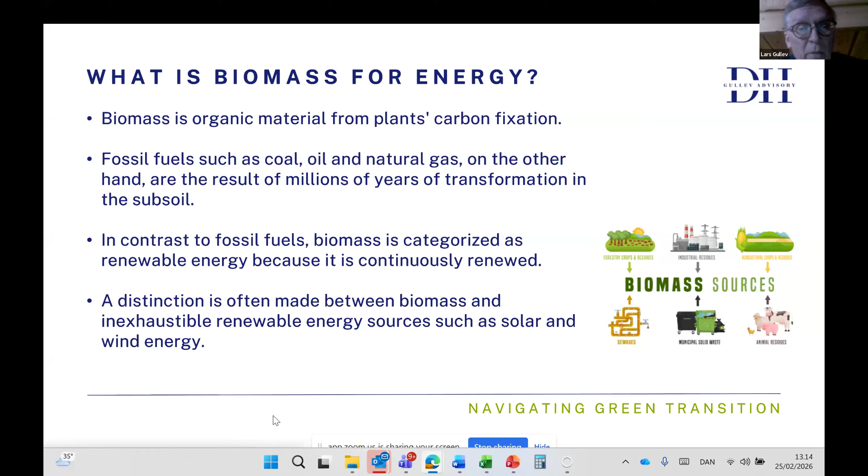When we talk about fossil fuels, of course they also consist of carbon, but it's carbon which has been built up in materials like oil, gas and coal many years ago. When we talk about solid biomass, it's in the form of firewood, wood chips, wood pellets, and energy willow, which I will come back to later in this presentation.

Then we have straw from agriculture in Denmark. We also have biodegradable waste, the organic material in waste from households. We talk about liquid biomass in the form of biodiesel, bioethanol, and bio-oils, which can be made from different kinds of crops, such as straw and rapeseed. And then we have the last fraction of biomass, which is biogas, produced based on manure from cows and pigs in the agriculture sector and other organic residual materials. Next please.

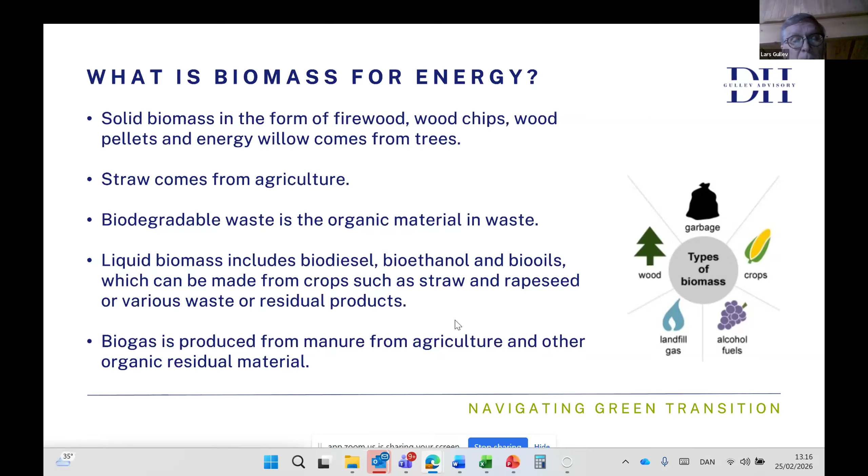To give you an impression of the consumption of biomass in Denmark, I will give you a few slides. So next please. The consumption of biomass for energy in Denmark is shown on this figure, and you can see during the last 20 or 35 years we have increased the consumption by a factor of 5, from 40 to 200 petajoule per year. We have it divided here into waste from organic fractions, straw, firewood, wood chips, wood pellets, biogas, and then biodiesel, oil and ethanol. So you can see a lot of fractions, where the consumption of wood chips and wood pellets is the fraction where the development has been most increasing during the last 10 to 15 years.

So next slide, please.

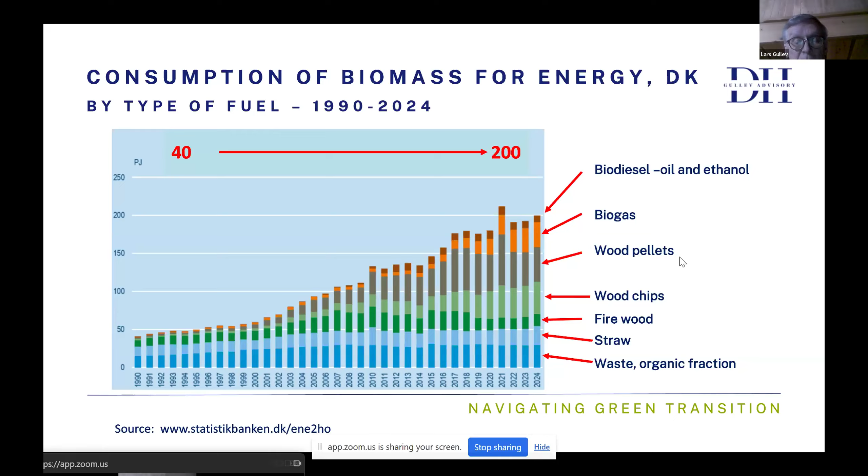If you look at the district heating sector and the production here, and again look at the different kinds of fuels we use there, you can see that 79% of all energy used in the district heating sector for producing district heating is more or less renewable energy. It's different kinds of biomass, but it's also electricity, primarily from wind turbines and PV. And then the last 21% is based on coal, oil, natural gas, and the non-bio part of waste from households.

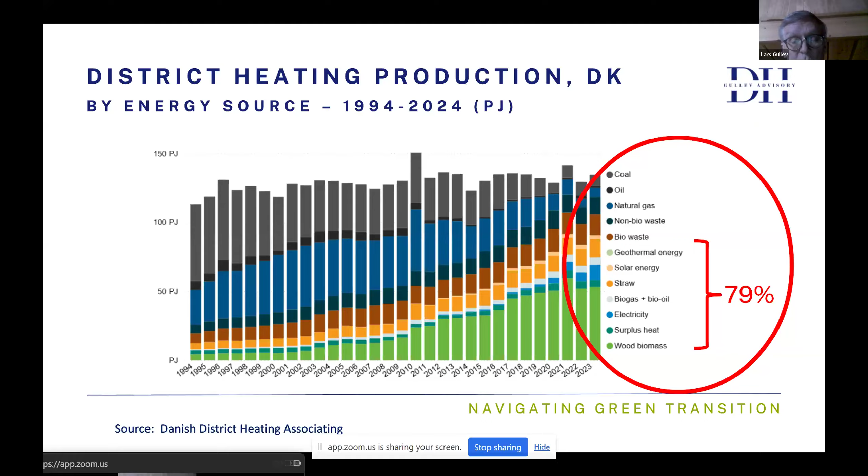So if we take the next slide, please. It shows again the development from 1998 until 2023. You see in the middle the development of renewable energy in the district heating sector. The consumption of coal has been dramatically reduced from 1998 until 2023, and at the same time, the consumption of biomass has increased. The biomass is the green one, and coal is the black one. So you can see a dramatic shift from coal to biomass in the Danish district heating sector.

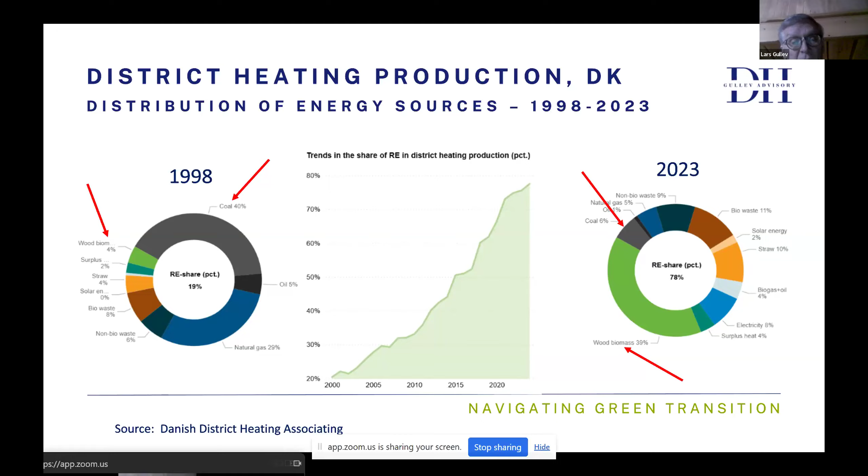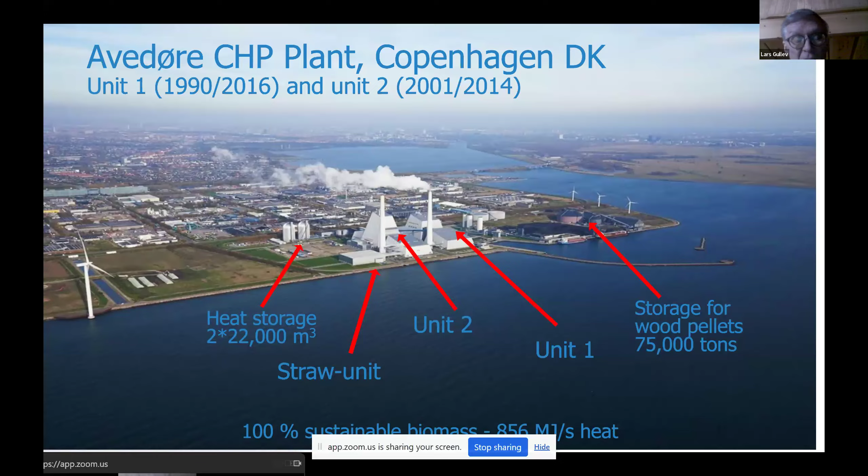Next slide, please. A huge installation just for inspiration. That's a combined heat and power plant built back in 1990 and 2001, from the time when we focused on centralized district heating production. We have changed this philosophy today, like you also do in Ukraine, to have a more decentralized heat production. But this is a huge combined heat and power plant in Copenhagen that consists of 2 units, 2 storage tanks of 2 times 22,000 cubic meters, and a storage for wood pellets. I will go more into detail with these 2 units in the next slides.

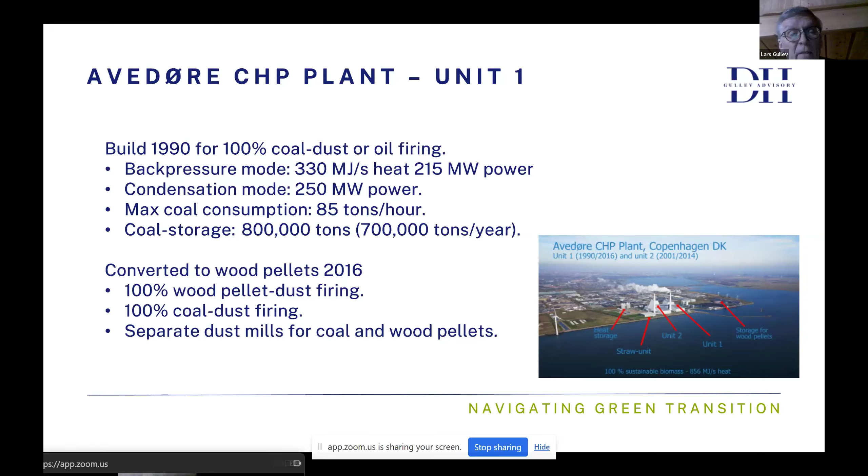Next slide, please. Unit 2 was built in 2001 for 100% natural gas and oil firing, and also straw in a small separate unit, or 75% wood pellet firing. It had a steam boiler and gas turbines, and in total back pressure mode it was 565 megajoules per second heat and 505 megawatt power. In 100% condensing mode, 585 megawatt power. It was converted to 100% wood pellet firing in 2016, so it could be fired 100% by wood pellets or 100% by natural gas.

The wood pellet consumption for Unit 1 and Unit 2 is 7,000 tons per day. From the picture in this slide, you can see that the storage facility for wood pellets is 75,000 tons. That means we have 10, 11, 12 days of storage capacity for the fuel now, compared to the good old days when the unit used coal and we had storage facilities for 1 year's operation. That means this is a challenge for the logistics when you make this shift from coal to wood pellets. Next slide, please.

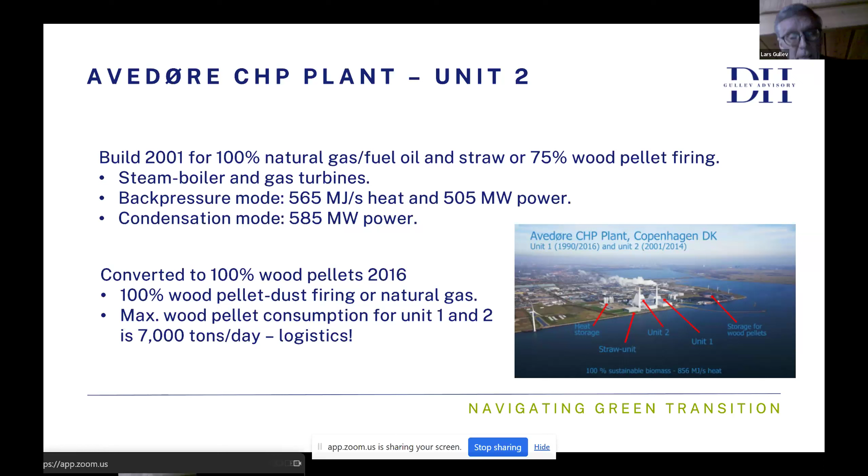Smaller installations in Denmark. Here's one from a smaller district heating plant. Today, 97% of their heat production comes from straw from the farmers in the neighborhood. The existing 7.5 megawatt boiler from 2006 was supplemented with a new boiler of the same size in 2014. So a district heating company almost 100% based on straw firing. And the next one.

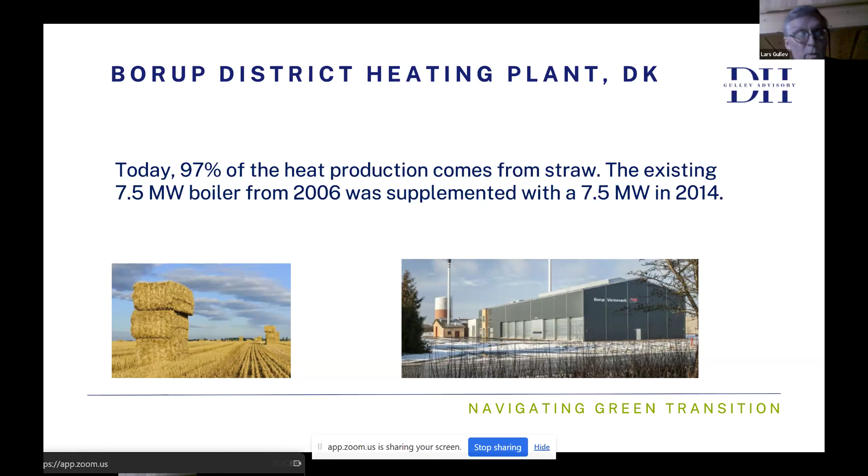Next slide, please. Yes, that's another district heating plant, founded many years ago, back in 1961. But what's interesting here is that today they have different units: an oil-fired plant of 16.5 megawatt, a wood chip-fired plant of 7.5 megawatt, a straw-fired plant from 2018 of almost 9 megawatt, and an electrical boiler. So instead of having a production capacity linked to one fuel, they can use oil, wood chips, straw, and even electricity. The electricity here is not primarily for producing district heating, but primarily for delivering services to the power system.

We can come back to that in another webinar. Yes, please, next one.

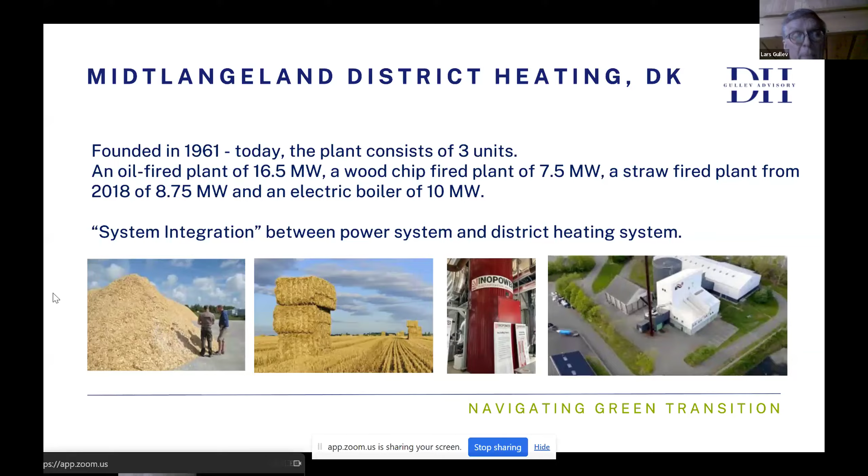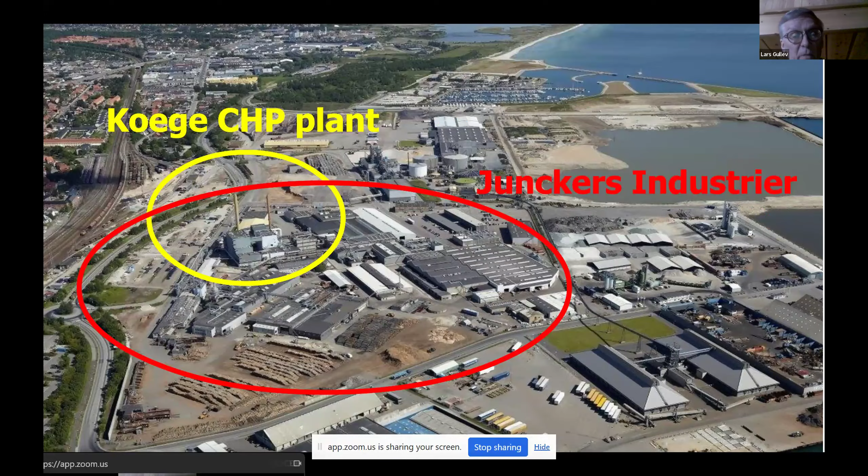Yeah, a combined heat and power plant, an industrial combined heat and power plant with 2 units, 7 and 8, built back in 1986 and 1998. Next one, please. It's built in connection with a big industry, the Junckers industry, and they built this combined heat and power plant to utilize surplus materials from the factory. Next one, please.

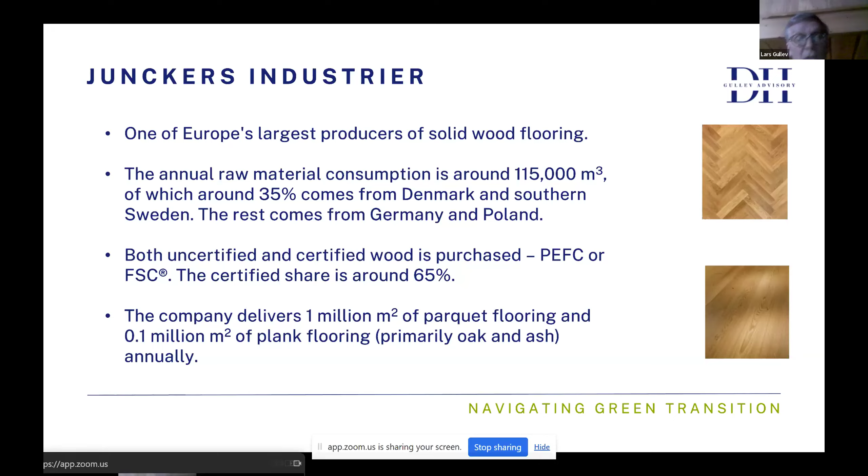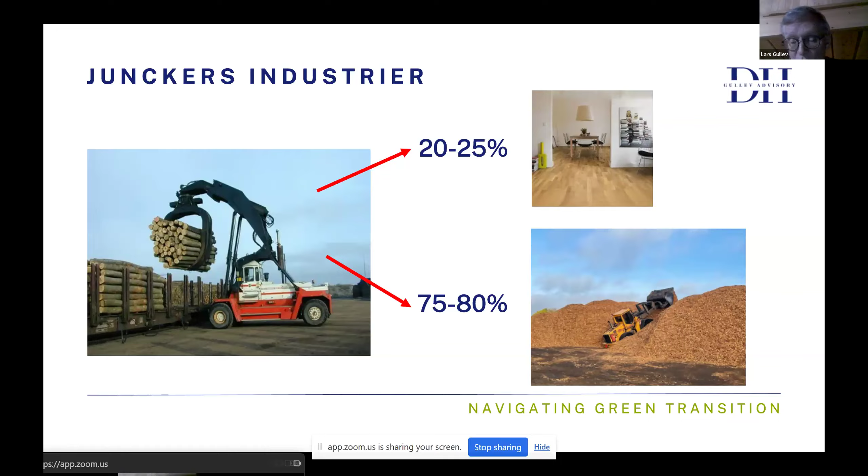When they produce these floorings, they get in the raw materials as logs. And when you look at such a log, they utilize between 20 and 25% for the floor production. The rest, between 75 and 80%, that's waste. So they have to get rid of this waste in the form of wood chips, in the form of sawdust, and in the form of dust. So next slide, please.

This biomass coming from the Junckers industry, it's 60,000 tons per year in the form of, as mentioned, wood chips, sawdust, and dust. And there's a contract between the factory and the owner of the combined heat and power plant going for 15 years, meaning that the district heating company owning the combined heat and power plant has an obligation to buy this raw material, and the factory has an obligation to sell all their waste biomass material to the district heating company. Next one, please.

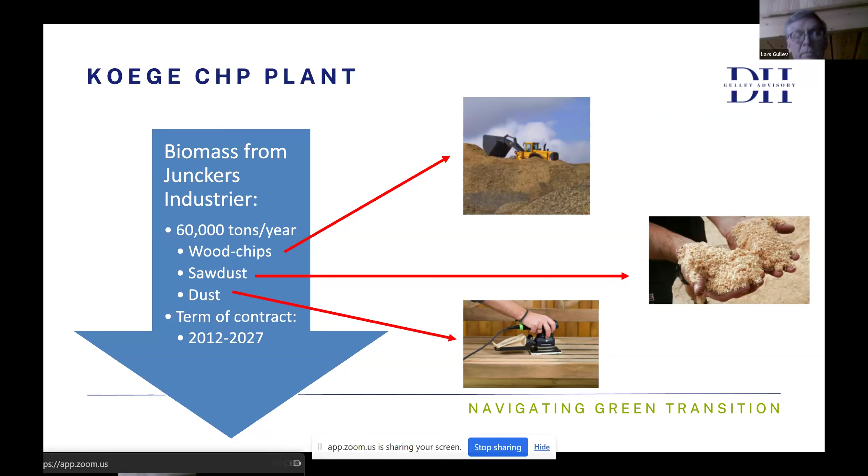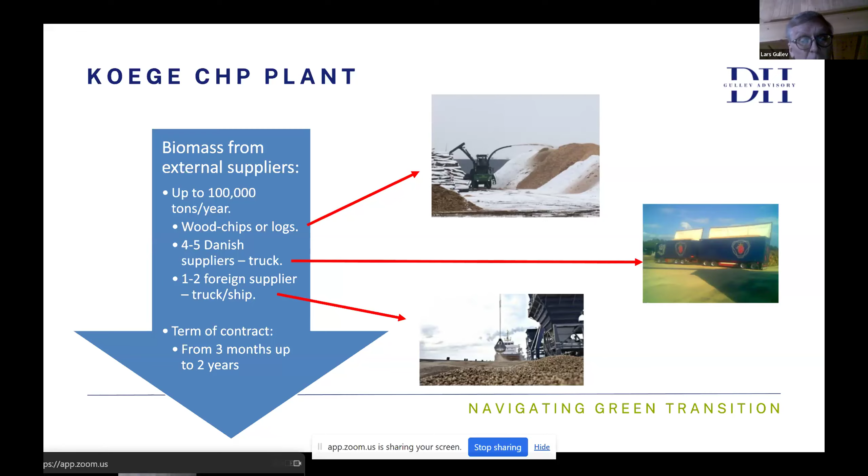Furthermore, the combined heat and power plant buys up to 100,000 tons of raw material from external suppliers in the form of wood chips or logs. There are 4 to 5 Danish suppliers of wood chips to the plant. It's transported to the plant by truck, and then there are 1 to 2 foreign suppliers, and it's transported by truck or shipped to the combined heat and power plant. And here we operate with contracts with a length between 3 months and up to 2 years. Next one, please.

The construction of Unit 8, it's relatively simple. It was built back in 1998, has an input capacity of 65 megawatts, and it's supplying electricity to the grid and process steam to the factory and to the production of district heating. And again, the steam production is based on wood chips, sawdust, and dust, all taken from the Junckers Industrier.

When the district heating company VEKS took over the plant back in 2012, they reconstructed and converted the plant from a condensing mode to a back pressure mode plant, meaning that all surplus heat from this plant is utilized for district heating purposes. The next one, please.

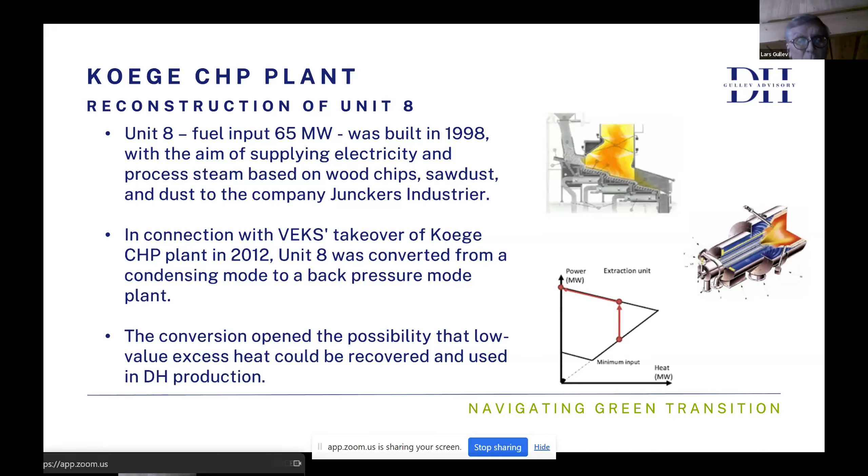They have improved the plant after taking over. So today the surplus heat from the cooling circuit for the lubricating oil is utilized in the district heating system. So 650 kilowatts is utilized, and the payback time for this investment was around 6 years. Then the ignition of the dust burners has been changed. So instead of using 300 liters of fuel oil for every start, they now use 3 kilos of wood pellets.

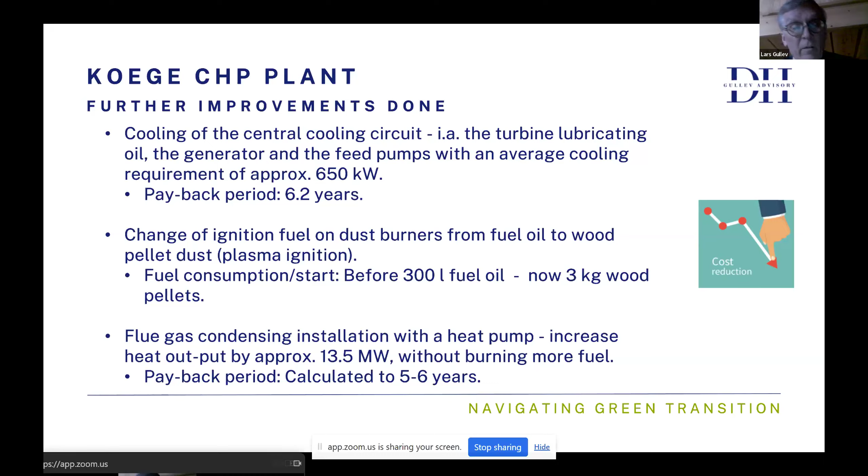And at last, a flue gas condensation installation with a heat pump has been installed, giving the possibility to utilize around 13 megawatts more without burning more fuel, and the payback time for this is calculated to between 5 and 6 years. So a lot of possibilities to make the process even more efficient. So next slide, please.

So what about bioenergy in Ukraine? A few slides. So if you jump to the next one, you have had a stable development of the production of biomass, around 3 million tons per year now. It's calculated by the Bioenergy Association of Ukraine that your potential is around 23 million tons. That means between 6 and 7 times more than you use today. So next one, please.

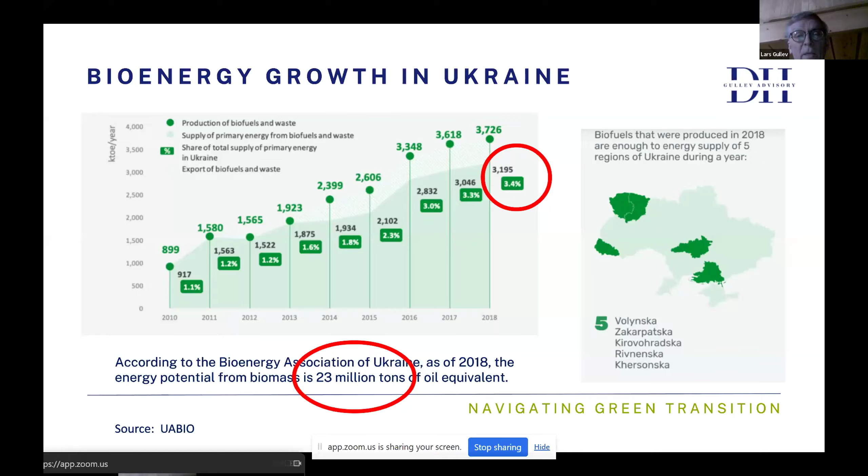The topic, energy crops. Energy crops are plants that are grown specially for use as a fuel or for biofuel production. At the moment, you have 3 million hectares of unoccupied agricultural land, of which you only use 0.1%. So if you used a part of this area for energy crops, if you used 1 million hectares, that means 1/3, you could replace half of all Ukrainian imported gas, the figures from 2018. So that's a potential if you utilize 1/3 of this area, which is not utilized today.

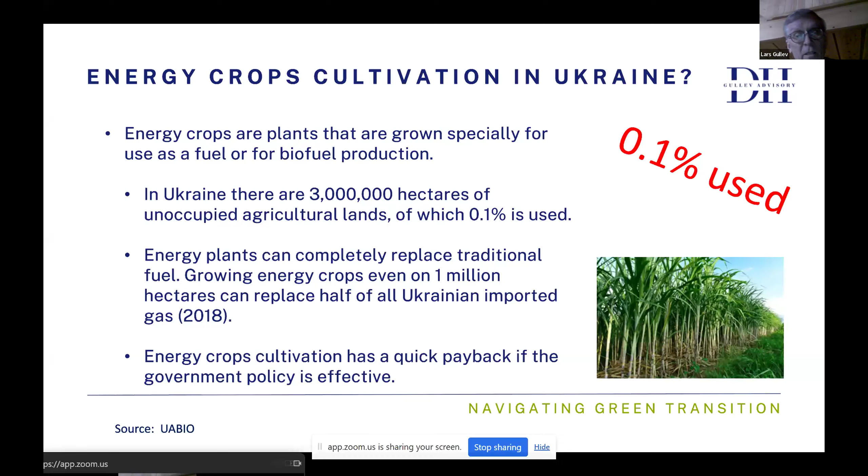And the benefit of using these energy crops is that it has a quick payback time if the policy is supporting this development and is effective. So next one, please. These figures, they are all from your Ukrainian bio organization, and it shows the development where you are today, where you are expected to be in the 2030s, and in 2050. You can see that the amount of energy crops is expected to increase from almost nothing to 3 million tons per year when we reach 2050.

So if you should follow this estimation of consumption of biofuels in Ukraine, you are busy. You are busy already this afternoon. There's no time for waiting. It's a hard job, but you have the potential. So I think that was the second last slide, and the last one should be a thank you.

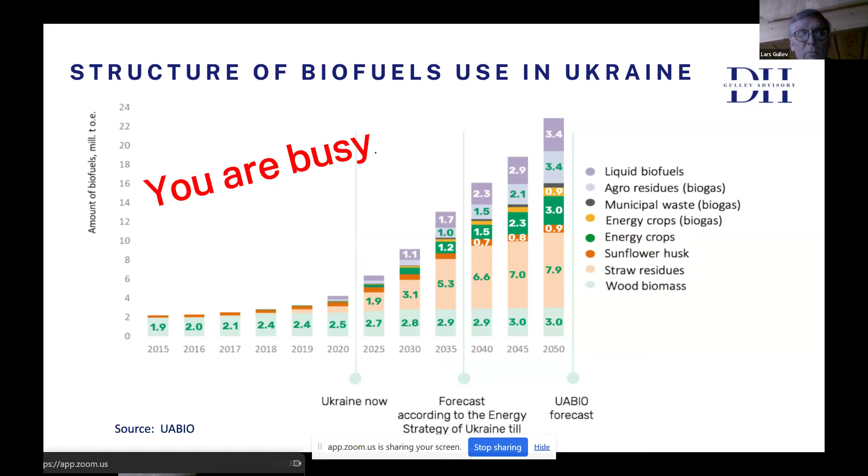Yeah, good. So that was a quick introduction to how we do it in Denmark. When we talk about biomass, we use many different types and fractions of biomass, and we use it in both huge installations, but also in small installations. When it's in small installations, it's often in a close cooperation between the district heating company and farmers or owners of forest. So it's possible to make long-term contracts.

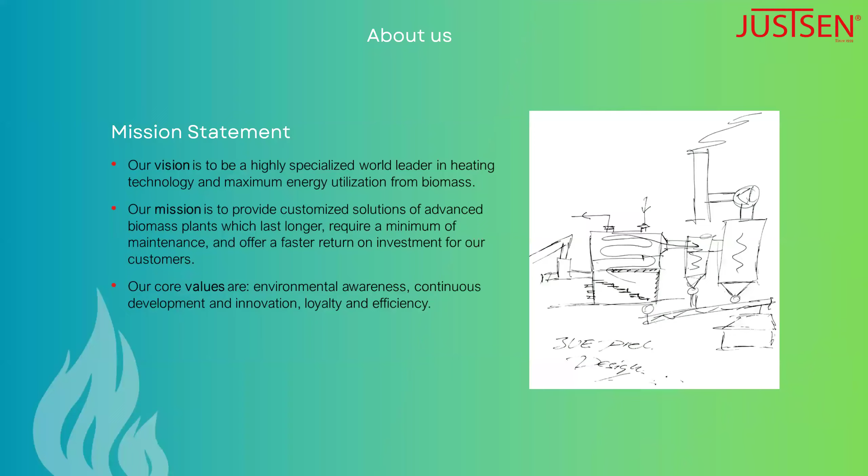So about us is that we want to be a world-leading biomass boiler manufacturer, and we want to be it in a style of OEM, where we are working with partners around the world. So we always comply with relevant environmental legislation, not just in the short term, but also looking to the future. And if we think about Ukraine, everything that we are doing is complying with EU legislation, because we expect Ukraine to become an EU country. So the systems will be designed according to those needs.

We do a lot of these speeches around the world, mostly in webinars. We are a member of World Bioenergy Association. We work in Australia, New Zealand, Asia, Central and South America, and all over Europe. So we think it's a very good idea to be member of these associations. And DBDH, Danish Board of District Heating, is not on this because I apparently haven't updated it yet.

And then we only deal with biomass boilers. And then we have a little side business working with waste incineration also, but it is in a more limited scope. Our solutions, they cover hot water, saturated steam, superheated steam, which is relevant here, high pressure hot water, and a little bit of thermal oil systems also, but that is very rare.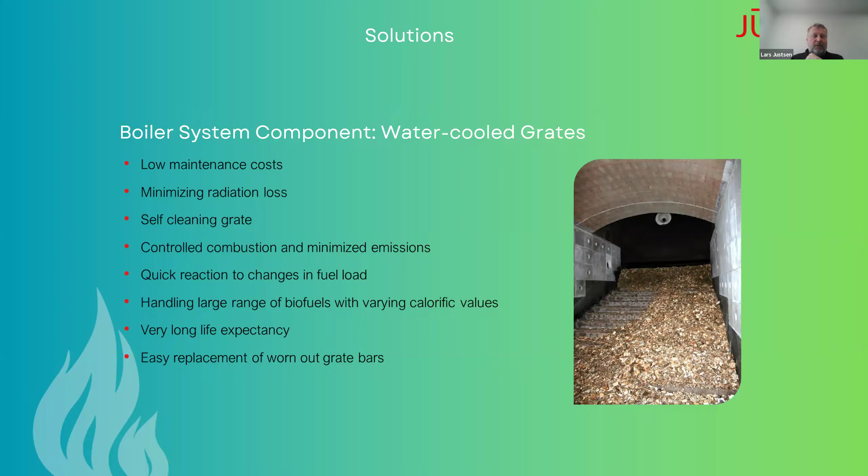So if we have very moist fuel, we equip the inside of the grate with ceramic tiles, which means that the ramping times on a system, which is especially important for agricultural residues and CHP, is shorter compared to a refractory lined air-cooled grate system.

And during our lifetime, we have developed different systems. When my parents started this company in 1958, there was nothing called biomass in reality. It was waste wood that was used in woodworking industry, and sometimes it was burned, and you made a little bit of heat on that. We started exporting in 1970, and as Lars Gullev's slide showed, we have now 80% coverage by renewable energy in Denmark. So we are, of course, mainly looking at the export markets.

And now to our findings from our work in the Mykolaiv region. We have studied 14 different types of agricultural residues and energy crops, and looked at their characteristics and their behavior in boiler systems. So we have studied these 14, but I have taken 5 out here because they have characteristics that are different from each other. First of all, Paulownia and willow, we have found out that they behave a lot like wood chips in a boiler system. And I have highlighted with red the things I want to talk about here.

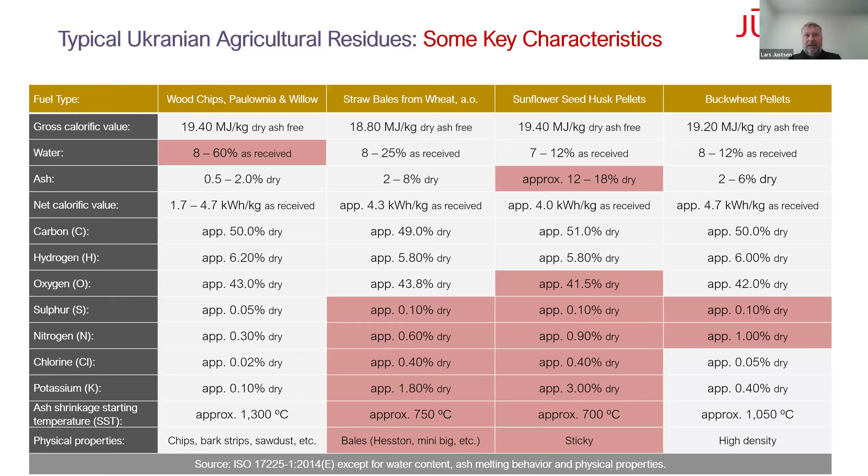Then on to buckwheat pellets, which was a nice surprise for us during these tests. And that is that they are slightly higher in sulfur and nitrogen than wood chips, Paulownia and willow, which makes it very, very suitable for highly efficient CHP plants. So that was the characteristics. My next slide then highlights what are the challenges here.

We have already talked about the large range of water content to cover with a combustion system for the wood chips and similar fuels. For the straw bales from wheat, the sulfur will develop SO2 emission plus corrosion. There are two types of corrosion relevant for a CHP plant. The first type is what we call low temperature corrosion. That is when you have a moist atmosphere, which you have in the ignition zone of a biomass fuel boiler, then you can have wet flue gases that contain SO2 that has already combusted that will form droplets on the heating surfaces. So that's low temperature corrosion.

When you do CHP, you have something called a superheater inside the boiler. And if you are above 360 degrees on that steel, SO2 becomes extremely corrosive. It's an exponential development of corrosion there. And I will state later how that influences the electrical efficiency. We have the NOx emissions that are part of EU legislation. We have the chlorine that develops hydrogen chloride, extremely corrosive. Dioxins, that is an emission that is not measured on biomass plants, except in France, but it is often relevant for local planning permissions.

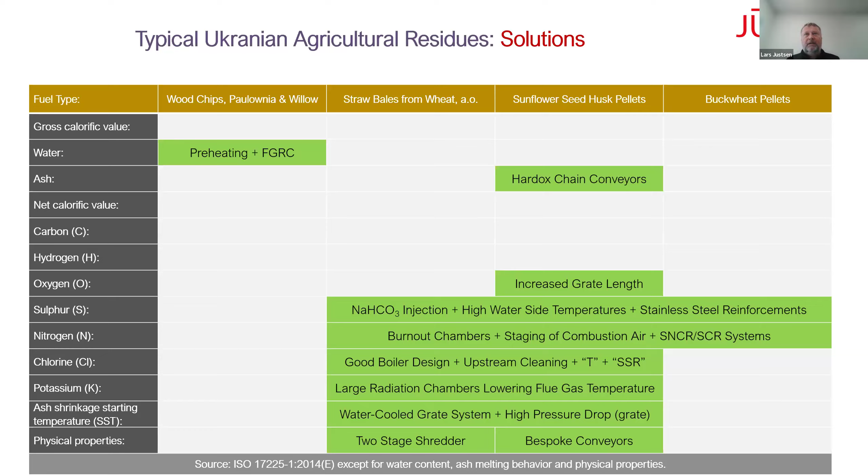I will try and speed up now. I will now go to the steam Rankine cycle to make CHP.

You have the boiler system producing superheated steam that goes to a turbine of the back pressure type with extraction, where you are entering at very high temperature and very high pressure, and then at the outlet of that you take a part of that and put it to the deaerator.

The rest goes into the turbine condensing stage, and as you saw on Lars Gullev's presentation, there are two completely different electrical outputs based on whether you're condensing the steam in the turbine or not. If you're condensing, which is what you would typically do in district heating, then you have wet steam on the backside of that condensing turbine. It will typically be 94% dryness, and that is what gives you an extra 6% of electrical efficiency.

And it goes to a steam condenser, and that steam condenser is cooled by the heating surface of the district heating. And that's the whole philosophy about making combined heat and power in a steam Rankine cycle.

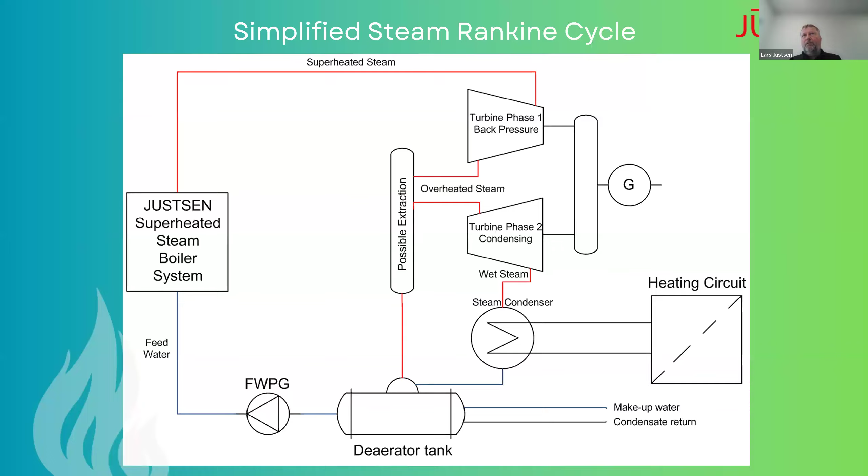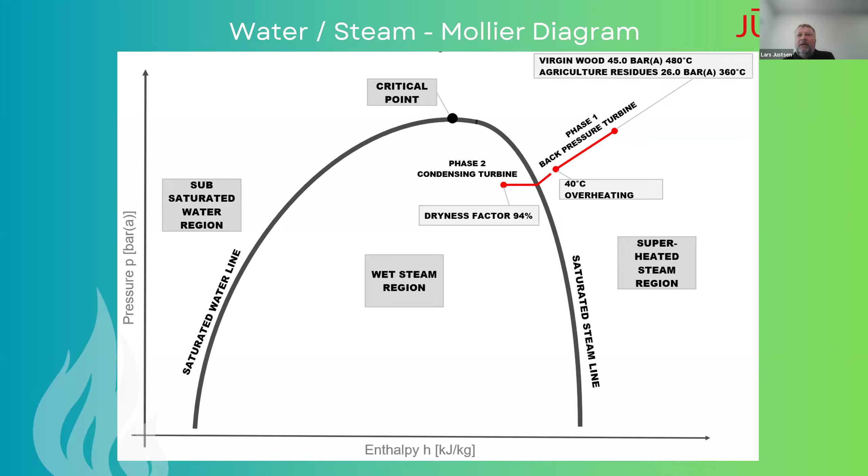Typically you will have around 40 degrees of overheating left when it exits the back pressure turbine. Then when it goes into the condensing stage, it passes through the saturated steam line and into the condensing phase, and that's what generates the electricity. It's a quite simple calculation, which I'll show you in a moment.

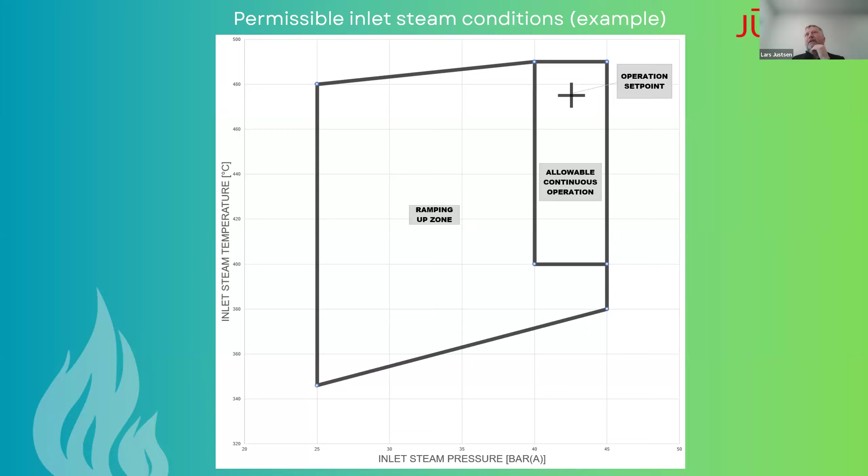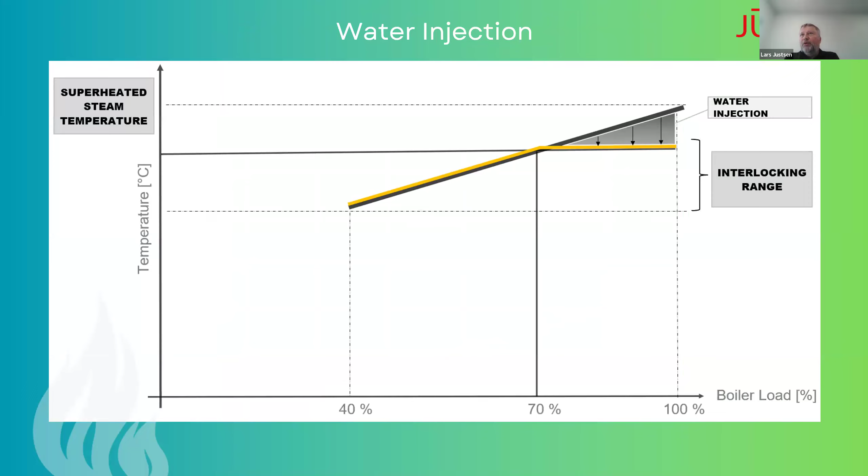And in the superheater, there is something called water injection, so you can flatten the curve and always operate between 70 and 100% load at that point.

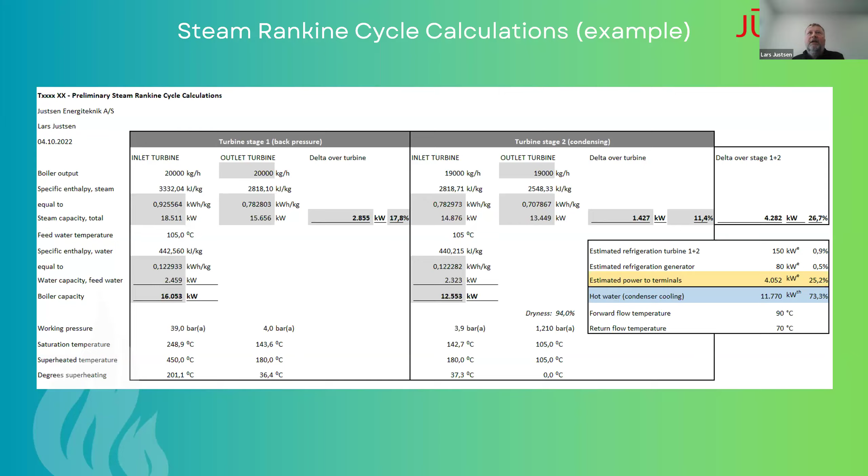That should not be confused with electrical efficiency. For electrical efficiency, you have to multiply by the thermal efficiency to arrive at that, which would typically be about 10% lower. That would mean it's around 24%.

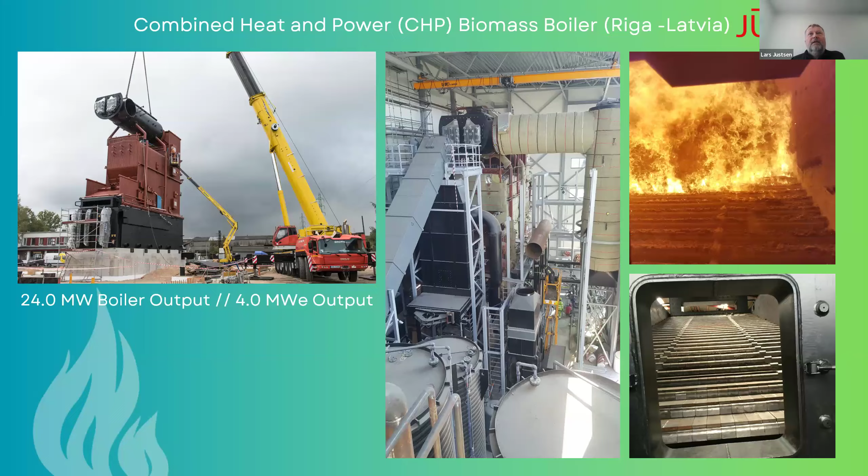And this is how a superheated steam boiler looks like on the inside. This is a 4 megawatt electric power plant that we built in Riga, and this is during the construction of the plant.

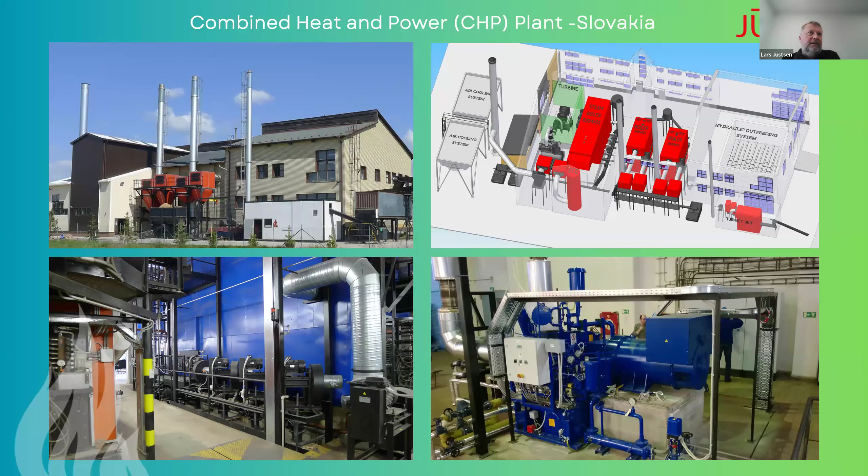We have several other CHP plants—this is a 2 megawatt plant in Slovakia. We work with different companies; we are an OEM, so we make the boiler, but we have strategic alliances with companies that can make the complete system. And that was basically it.

Thank you very much. I hope I managed to catch up a little time here, and thank you for listening.

I will speak a little fast—I only have 15 minutes and time for a few questions. But you can have the presentation afterwards in PDF, and I also gave Lesia our brochure and our expression of interest form for those who want to participate or cooperate with EIFO. With these words, I will get started.

The purpose of EIFO's Ukraine facility is to contribute to rebuilding critical infrastructure and to develop the private sector and economy of Ukraine. Energy is high on our agenda, and we've already done quite a lot of projects within energy, but until now not within biomass. We are very interested in doing these kinds of transactions in the future.

Besides rebuilding Ukraine, we also create jobs in Denmark, by demanding at least 30% Danish content in the projects we finance. This means if a project costs 100, we can provide financing in different ways, but under the condition that at least 30 out of the 100 comes from Denmark—that can be services, machinery, or others.